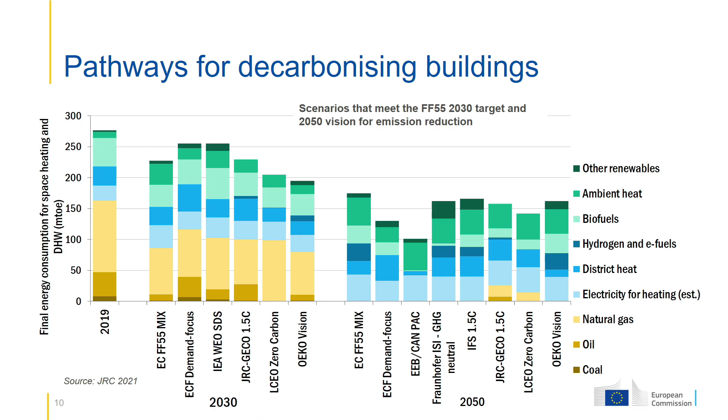So first of all, I would like to speak about the building decarbonization pathways. Here the figure shows the final energy consumption for space heating in buildings. So we see that in 2019, more than 60% of the space heating demand was covered by fossil fuels. And here to 2030 and 2050, the bars represent results of various organizations, which look at what does it mean for the building sector if we want to reach the Fit for 55 targets. Where does it go? So we see that by 2030, we have to reduce the fossil fuels.

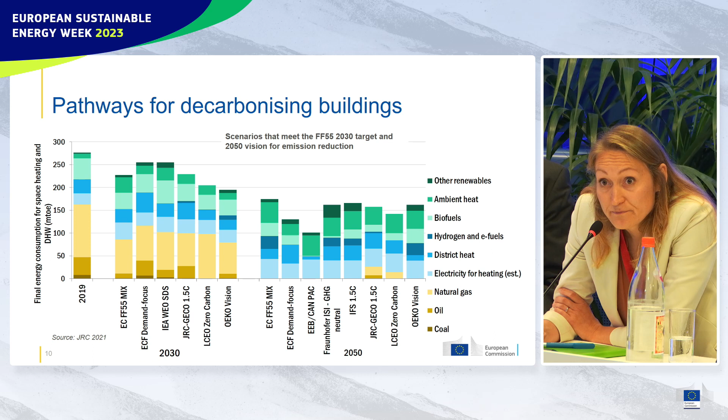And when it comes to the role of heat pumps, here the ambient heat as a final energy consumption source is increasing. And looking at the long-term scenarios to 2050, we see that ambient heat is emerging as a main energy source supplying space heating.

So now, looking specifically at the member states, here's the figure showing the current status of the share of fossil fuels in the total space heating in EU member states in 2020. And we see that there are still a few member states fully relying on fossil fuels. When it comes to gas consumption alone, there are 5 member states which have more than 50% of the heating consumption covered by gas.

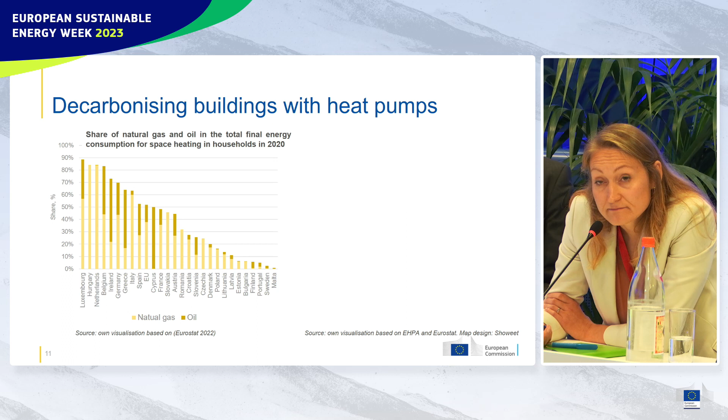And now switching to the heat pump market. So heat pump sales have grown in the last decade. Based on the Heat Pump Association's data, we saw that from 2011 to 2020, heat pump market sales grew on average by 11%. And we see that in 2022, the sales boomed. And in this year alone, 3 million heat pumps were sold, and 90% in the building sector. However, if we look at the market share, we see that there are differences between the member states, and in some countries, the heat pump represents a very low share of the heat supply, except for some Scandinavian countries.

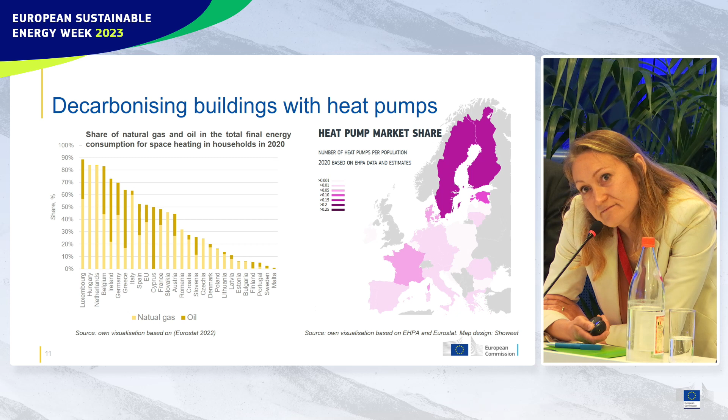So now a little bit about our methodology approach. So to really analyze the performance indicators from going from individual gas boilers to heat pumps, we analyzed approximately 600 residential buildings across Europe using some available data sources. Here, the Tabula database, also the Hotmaps project database. And using this data, we analyze the current and future energy trends. So using our in-house bottom-up building stock model, we used calculations based on some European standards. And finally, to calculate the impact on the power system, we used another model, which is called METIS, that was done by our colleagues.

So, speaking about buildings and how suitable heat pumps are for different buildings. First of all, the efficiency of heat pumps is influenced by the temperature of the heat source, which is ambient heat. Ambient, in the case of air-water, is just the temperature outside. And the flow temperature of the delivered heat. So if you consider a building with a gas infrastructure, it's just the flow temperature in the radiators.

So these general buildings with gas and oil boilers typically have a maximal flow temperature level ranging from 55 to 90 Celsius, and this parameter is important when it comes to the efficiency of a heat pump. Based on that, and depending on different parameters, an existing building might decide whether it's okay or whether it might improve thermal insulation in the building envelope, upgrade radiators or individual units with larger ones, or perform hydronic balancing.

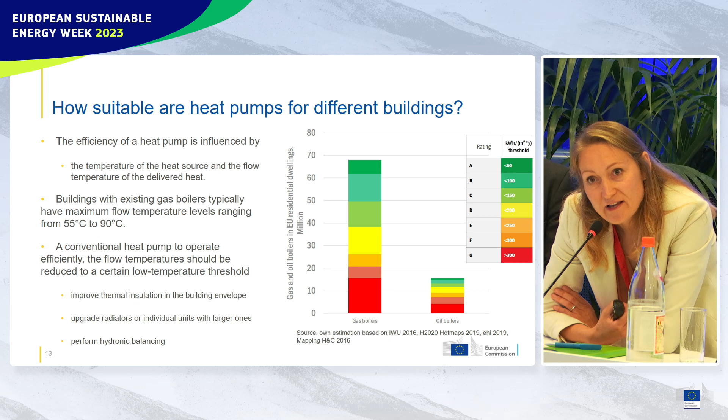In our analysis, we try to understand the building sector, especially buildings with gas and oil boilers, and how well they are suitable for a heat pump. This is a very simplified approach because we use the data to calculate their energy need for space heating, and there is no direct link between specific energy need for space heating and efficiency, but indirectly we can see that approximately 40% of all building stock with gas and oil boilers consume less than 150 kilowatt hours per square meter, and you can consider that the heat pump can work optimally in those houses.

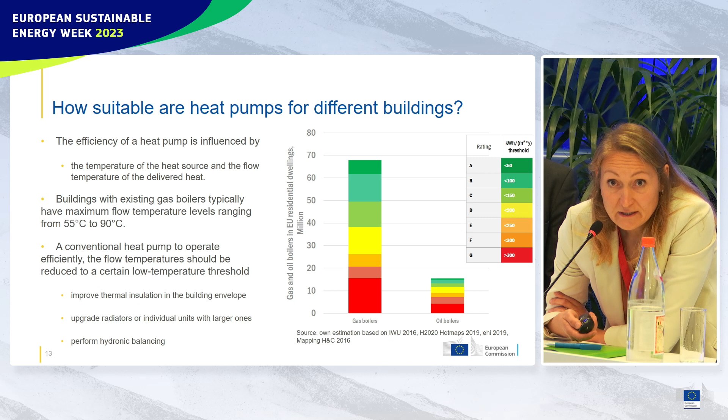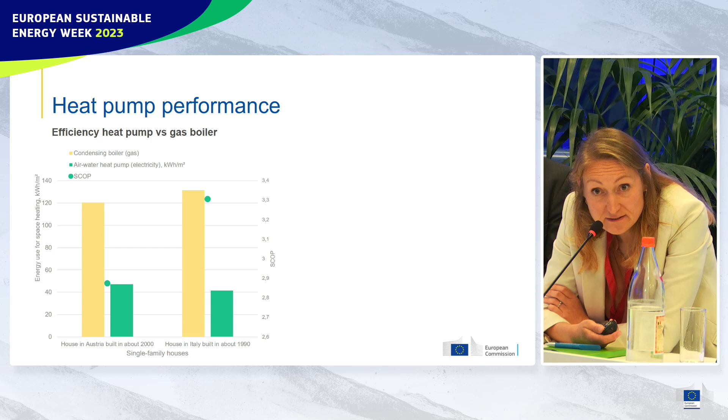A little bit to present some performance indicators, just to compare the efficiency between a heat pump and a gas boiler. Here are two residential buildings, one located in Austria, one in Italy. The yellow part is the specific energy demand using a gas boiler, and the green part is what happens if we change from a gas boiler to a heat pump. The building in Austria can reduce 60% of the yearly energy demand for space heating, and the house in Italy can reduce 70% in this case.

So we know that in 2023 the electricity to gas price ratio was lower. So in 2023, if we consider those as constant prices, even considering the high upfront cost over the whole lifetime, the heat pump can be a cost-effective investment.

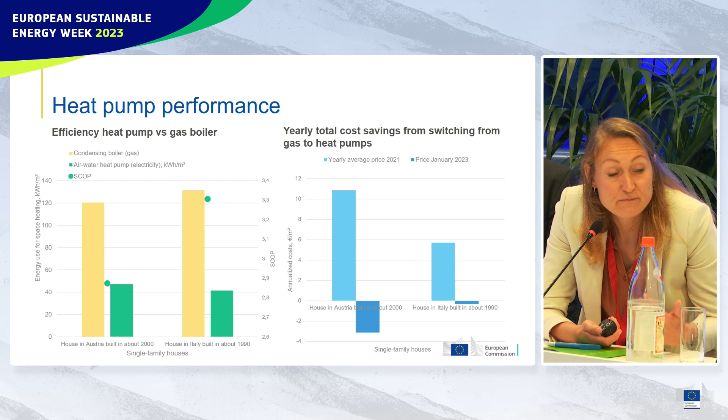Now, we modeled what the 30 million heat pumps by 2030 mean for the whole residential building sector. Here we made some assumptions. We assumed that all these 30 million heat pumps would replace individual gas and oil boilers. We also assumed that 60% of these changes would be combined with some building envelope improvements, and these heat pumps are proportionally allocated among the member states. So the highest number of switched boilers would be in Italy, Germany, followed by France, Spain, and the Netherlands.

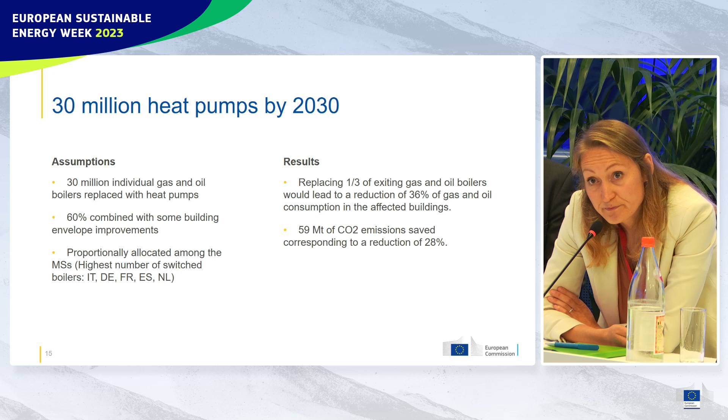So the results: replacing one third of existing gas and oil boilers would lead to a reduction of 36% of gas and oil consumption in those buildings. And we can save 59 megatons of CO2 emissions, which corresponds to a reduction of 28%.

So when we speak about the annual values, the heat pump electricity demand will constitute 5% of the total demand. In winter, it's 11%. The heat pumps will have a larger influence on the annual peak hourly demands. Our colleagues who analyzed this see that there is only a moderate impact in terms of generation mix and power prices of these changes. However, they don't take into account the impact of the local grid.

And demand response flexibility strategies can alleviate a considerable proportion of the stress. Pooling heat pumps can also have a very high impact. To conclude my presentation, replacing fossil fuel boilers with heat pumps not only offers significant climate benefits, but it contributes to improving the energy security of the European Union. The climate benefits are higher when the grids have larger shares of renewables.

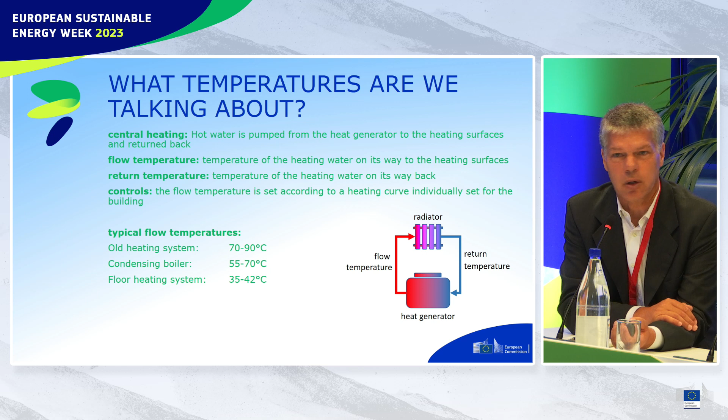Yes, I apologize, I have to take you a bit into heating technology. But you have an idea what the flow temperature exactly is. It's the warm part of the heating circuit, so the temperature that the heat generator has to provide. This is the critical temperature, a critical point. And as Agnes said, it usually ranges between 55 and 90 degrees. If you have floor heating systems, of course, it's lower. But in the past, some people said heat pumps should only work with floor heating, and that's not true. They can operate at higher temperatures.

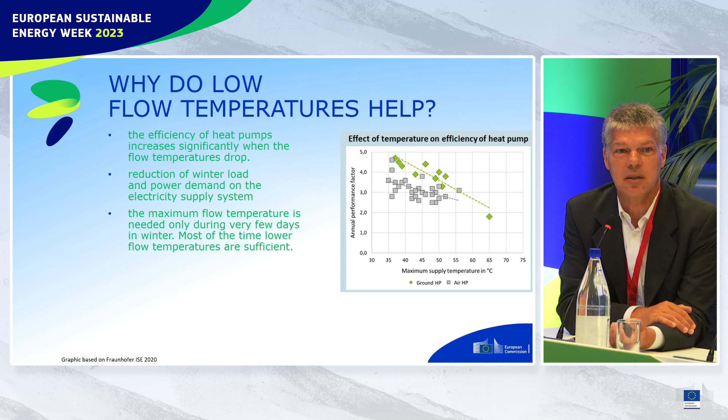But why is this flow temperature important for heat pumps? We have a very direct connection between the flow temperature and the heat pump efficiency. In this picture, we see the temperature rising from left to right. So the higher the temperature gets, the more the efficiency of the heat pump will drop. These are real buildings and real heat pumps, a study from Fraunhofer, and we clearly see this trend. You cannot deny this. Low efficiency is one thing, but this of course leads to higher energy bills, and in cold winter days, to a higher load on the electricity grid.

Yeah, what can we do? What are the fields of action to address the flow temperature? These are mainly two fields. The one is the heat loss of the building, influenced by insulation and air tightness and everything. On the other hand, it's the heating system itself, so the size or the type of radiators. Ideally, the flow temperature is exactly at the point where the heat from the radiators is exactly the loss the building has. But this would require correct settings of the control system, and this is not what you usually find. I think many control systems are still in the default settings from the start.

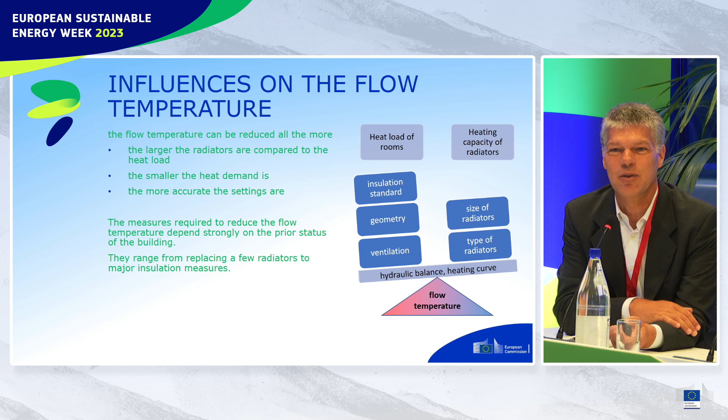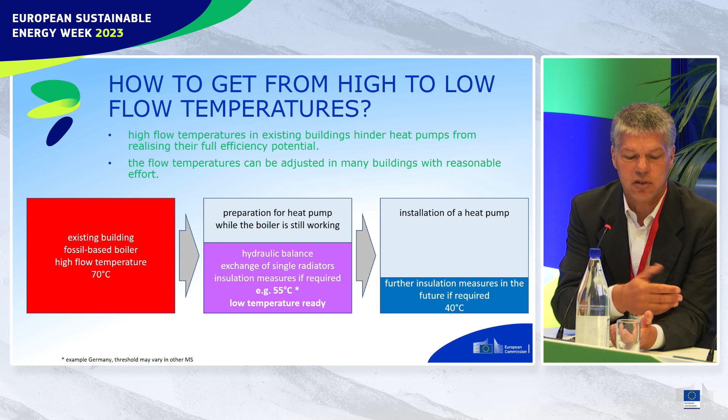As I said, we thought it's a good idea to not always say prepare your building with this and that flow temperature, but give it a standard, a name, and the name is low temperature ready, or LT ready, because that's easier to communicate and easier to put in political instruments. How to find this temperature is not that easy. In Germany, we thought 55 is fine. Why not higher? If we went to 60 degrees, the heating cost would exceed the cost of fossil fuels, since the efficiency would drop that low. And why not lower? Of course, heat pumps run better with lower temperatures, but we see it as a door opener: the worst temperature that is still feasible, so as not to exclude too many buildings.

Yes, and now we come to the policy instruments. So far, this was just the introduction. But yes, in general, political instruments are information, legal regulations, and funding schemes. And which of them to implement in one country, of course, depends on what is there in the country. But if we dive a bit deeper,

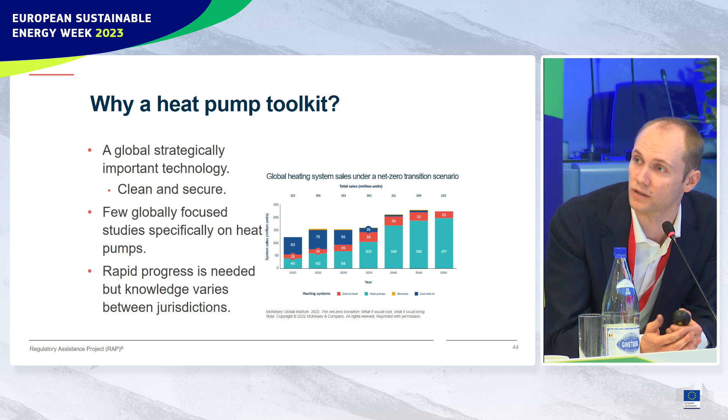So we have given the toolkit a shape loosely based on that of a Greek temple. It's really about not advising single measures, but really a whole package of measures that countries can implement that lead to a really sustainable heat pump market. And it's all based on a really strong foundation of coordination and communication. And then we have 3 pillars, one around economics and market instruments, one on financial support, and one on regulation.

And this really comes from the lessons we have learned from several of the front-runner countries that have already had strong heat pump markets for years now, or even decades. And there we've seen that coordination and communication have been a huge part, especially in the initial phases of driving heat pump deployment. So making sure that households, but also businesses and especially installers are really included in awareness raising and engagement programs, and also to really include civil society in your plans.

So maybe to give some examples, Sweden launched a procurement campaign already in the early 90s, which led to a doubling of heat pump sales. And then if we look at the type of things they did, we see that 50% of their budget was actually spent on communications. So that's really a significant part in these early stages to get people used to this technology that they might be unaware of.

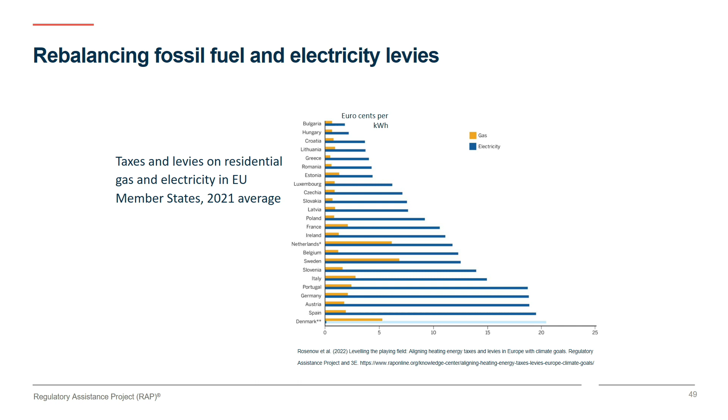And so if we look at the majority, I don't know if it's visible, but if you look at the majority of the countries, the blue bar is how electricity is taxed, and the yellow bar is how heavily gas is taxed. And then we see that in the far majority, or basically every EU country, electricity is taxed much more heavily than gas. And so this is something we need to rebalance to really make it worthwhile to operate a heat pump. Also financially, because there will already be savings just by the fact that you're on average 3 times more efficient when using a heat pump compared to a gas boiler. But if you don't see that in your energy bill, then I think it will be a very hard sell.

And some of the ways you can do this is, for example, in Denmark, they decided to almost take away tax on electricity used for heating. So there's now a very low tax on electricity used for heating above a certain kilowatt-hour threshold. But another option would be, for example, in the Netherlands, where they rebalanced and moved some of the taxes from electricity to gas. And there's different ways to do this. I think overall our preference would be to rebalance it, so taking away taxes from electricity and putting it on fossil fuels.

So then the second part of making the economics of clean heat work is getting them installed in the first place. And installing a heat pump for the first time usually brings some extra costs. Maybe you need to make some radiator changes. Maybe you need an electrical upgrade. Maybe you need a boiler, because in many countries you do not have that yet. And then maybe there's also some works involved, and after someone drilled a hole in your wall to put in the new electricity cable, you need to make it look pretty again. So these are all some extra costs that you have when you switch for the first time to a heat pump, but you won't have, of course, at the second replacement cycle.